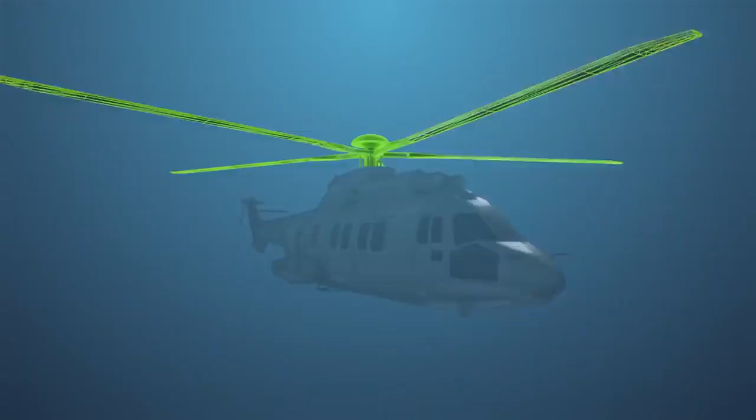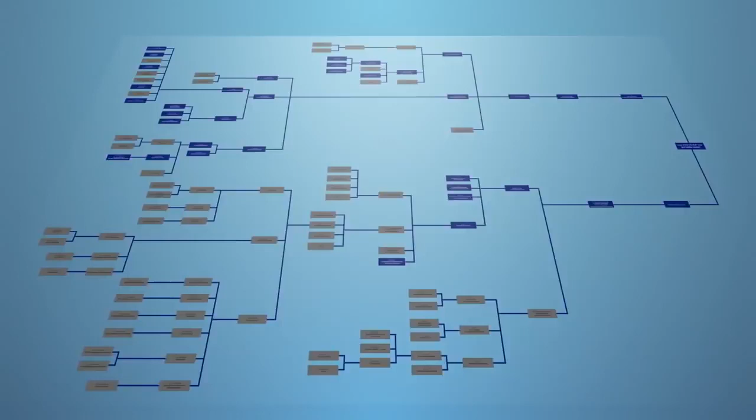Initial observations revealed that the rotor had separated from the cabin. In response, we began by listing all the possible scenarios that could have led to such an outcome, even the most improbable ones. One by one, every branch on the fault tree analysis was put to the test in order to confirm or rule out each hypothesis.

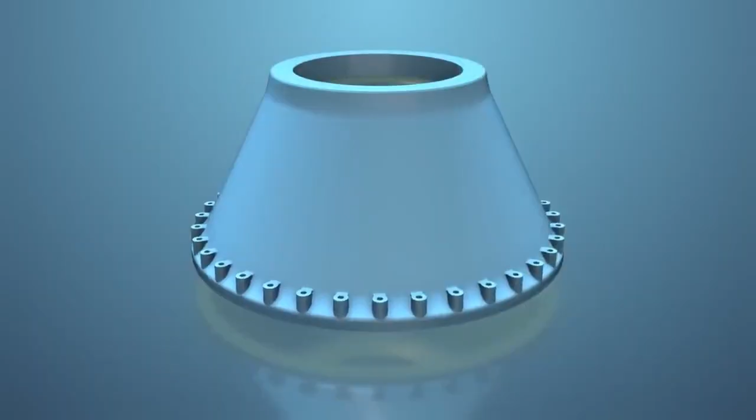We drew on all the information gathered by the investigators on site to piece together exactly what happened. Each and every detail was taken into consideration. We also used complex numerical models in simulating different failure modes, comparing them with observations of the actual parts.

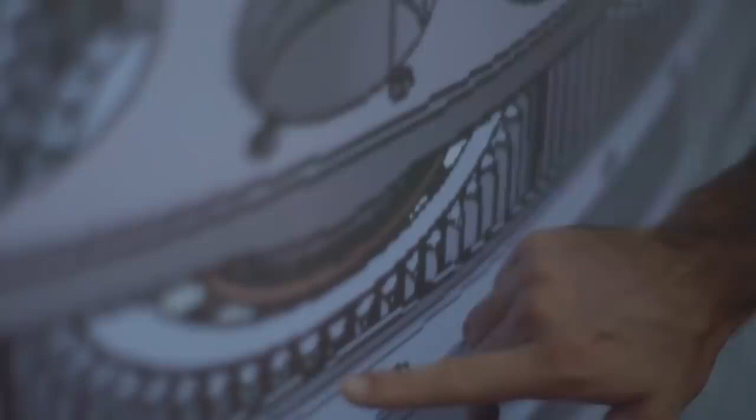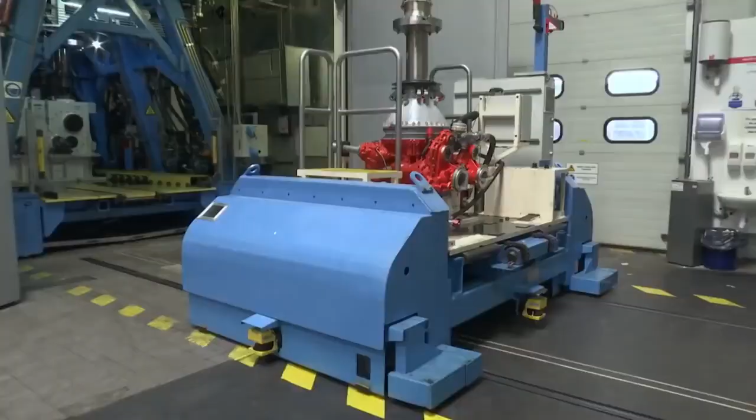In the meantime, we considered and examined a 2009 Super Puma accident that bore similarities. Finally, we carried out about 2,000 hours of testing in dozens of different tests, the aim being to reproduce the failure scenarios envisioned and to identify which one actually occurred. In total, more than 370 people were called upon during the course of a year.

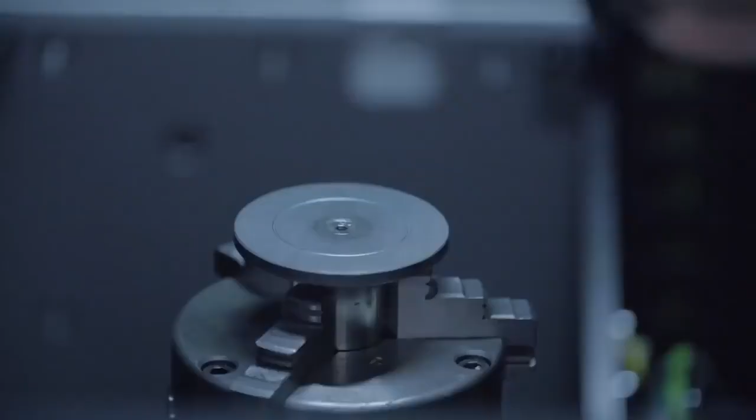Throughout the official investigation led by the Norwegian Accident Investigation Board and supported by Airbus Helicopters, we were able to identify precisely the sequence of events.

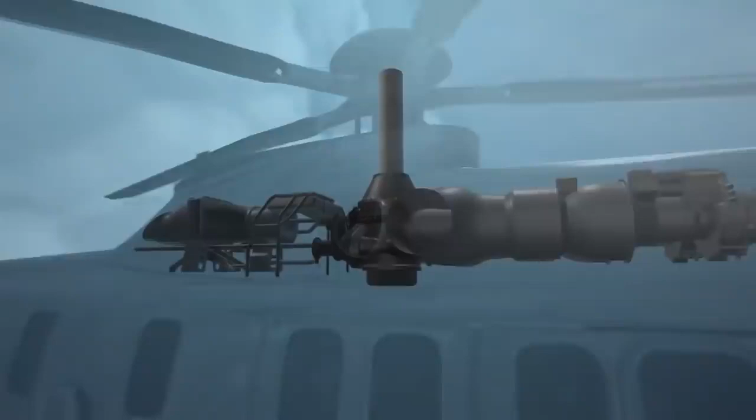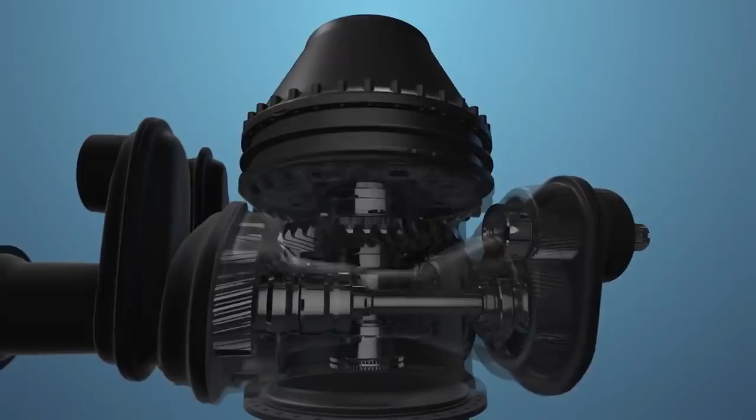The origin was traced back to the inside of the main gearbox, a key mechanism in the aircraft, as it transmits power from the engines to the rotors, while reducing rotational speed from 23,000 RPM to 265 RPM for the main rotor. The inside is a series of reduction stages comprising gears manufactured using the finest material and surface treatment technologies and in line with the highest quality standards.

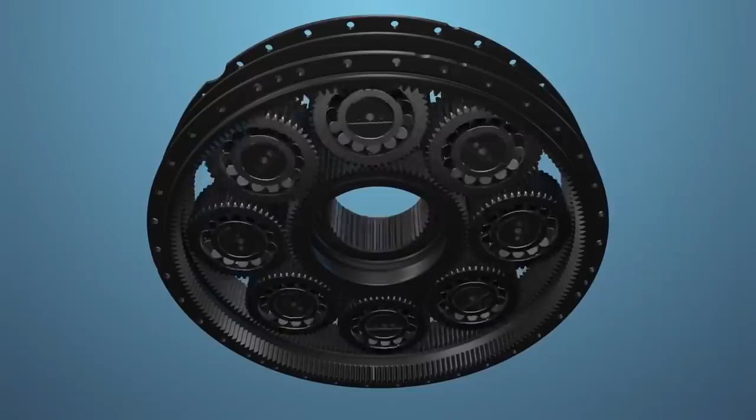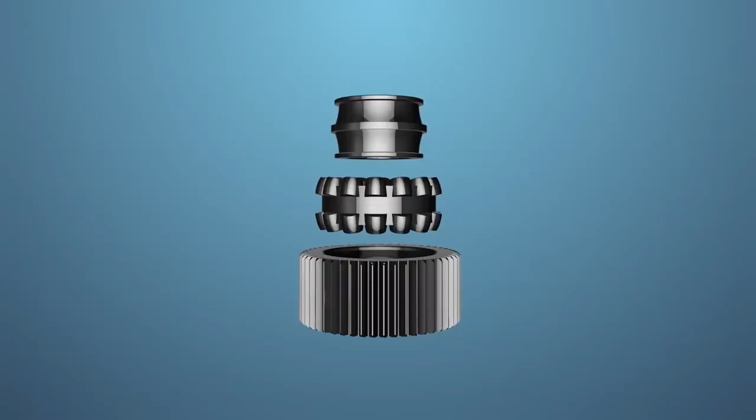The second stage, epicyclic gear train, comprises a sun gear, 8 planet gears, a planet carrier, and a fixed ring. Each planet gear contains 1 inner race, 2 rows of rollers, and 1 outer ring.

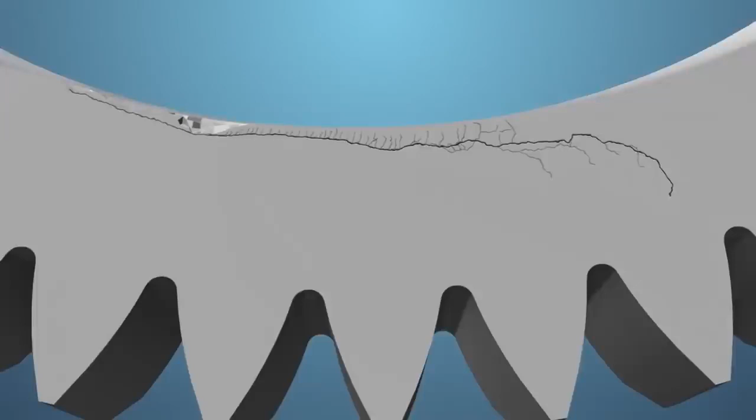It is inside this ring that the failure began, with an initial and very limited spalling. Unexpectedly, this very limited spalling gave way to a crack, which then spread until the planet gear split in two between 2 teeth. The space between these 2 teeth grew, causing a collision with a tooth on the sun gear. The planet gear broke instantly.

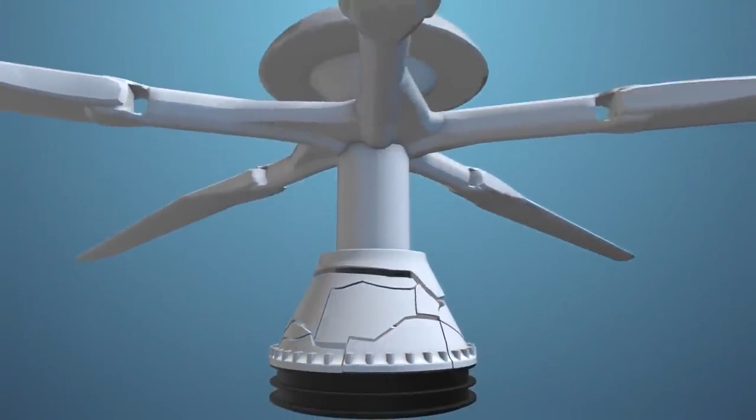Pulled by its own inertia, the main rotor caused the top section of the main gearbox to shear off and separate from the structure.

Let's go back to the beginning, however. How could such an accident have happened?

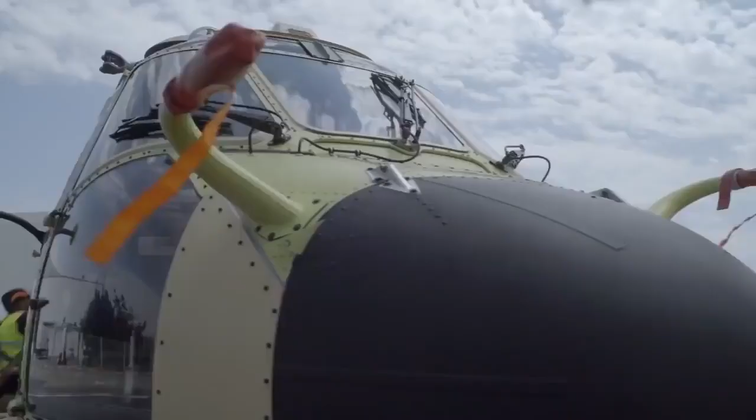The potential contributing factors were identified, and safety barriers were put in place to eliminate their reoccurrence. One of them is the non-detection of very limited spalling. Spalling is a normal degradation of bearings that remains acceptable up to a certain amount. This is monitored with magnetic plugs that collect the metallic particles.

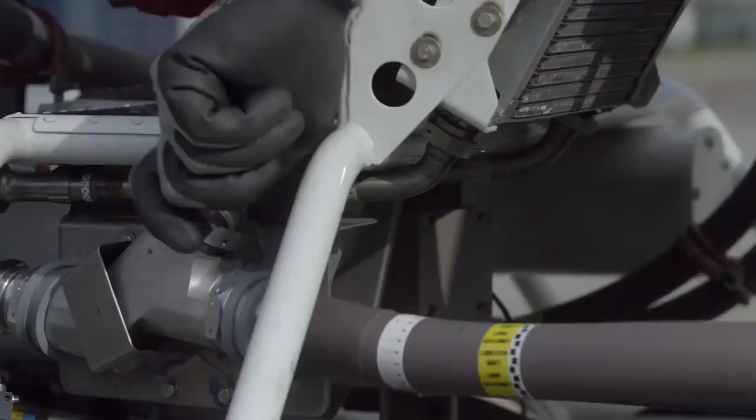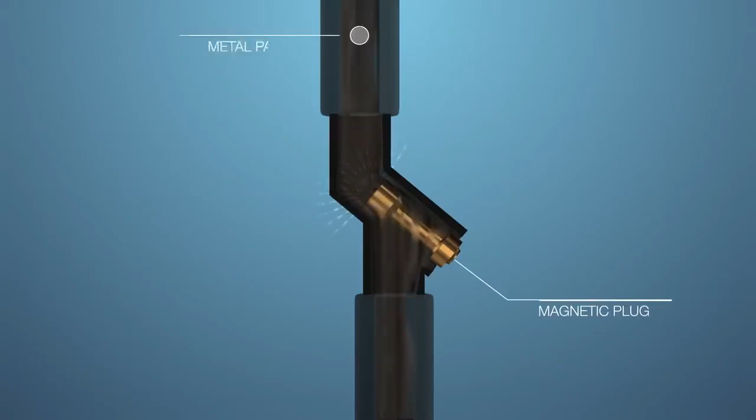In the case of LN-OJF, the defined practice of particle detection was not sufficient to reveal very limited spalling. We have therefore improved this practice of metal particle detection. The frequency of inspections has been significantly increased. Stricter removal criteria have been put in place regarding particle sizes. Detection methods were completely overhauled and now include a latest generation magnetic plug with increased performance.

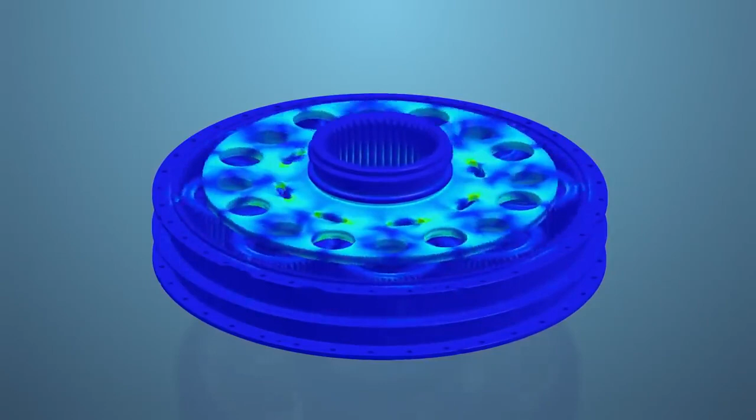Another potential contributing factor is the phenomenon of fatigue. Some metal parts subjected to high repeated stress have a defined number of cycles before their possible failure. Airbus Helicopters therefore defines a maximum operating time for each part.

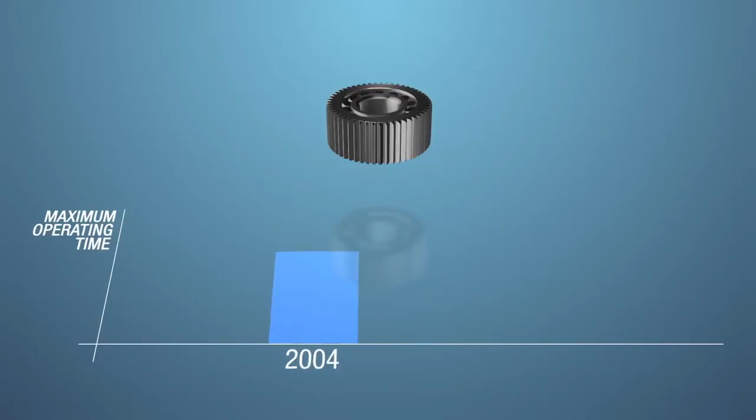In 2004, Airbus Helicopters defined a maximum operating time in accordance with the certification requirements. In 2017, based on the learnings from the accident investigation, this maximum operating time has been reduced by a factor of 4. Another potential contributing factor is linked to the design of the planet gear.

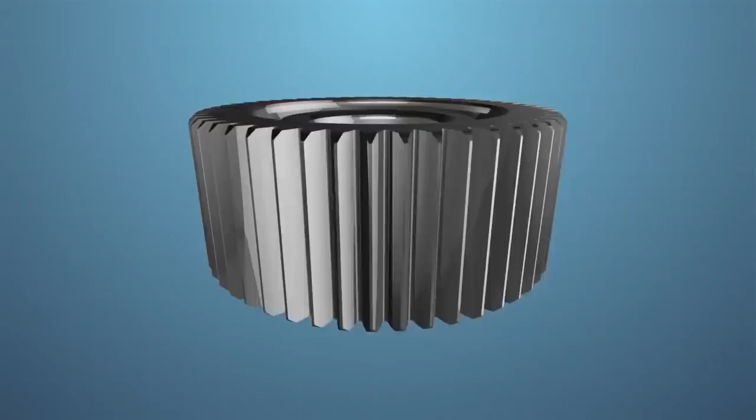Two suppliers manufacture these planet gears, and their designs are not 100% identical, even if both match the technical specifications. The second creates greater contact pressure and was used in the LN-OJF's main gearbox.

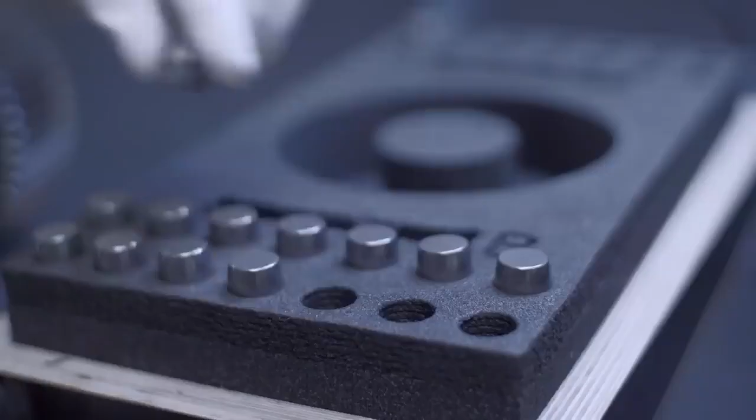This planet gear has now been prohibited outright. The only planet gear now present in our Super Puma family has registered 22 million flight hours without any outer race spalling having been detected in normal conditions.

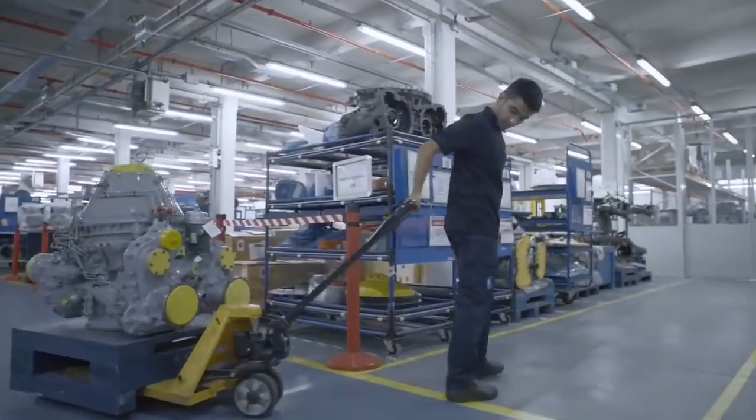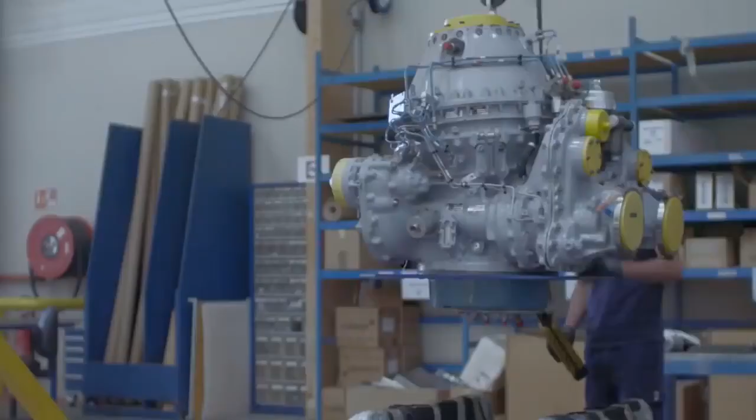Another potential contributing factor is external damage occurring to the main gearbox. Before being fitted onto the helicopter, the main gearbox in question sustained a fall during a road transportation accident. It has been decided to withdraw from service any main gearbox having suffered a shock, a lightning strike, a hard landing. In addition, we put in place a series of initiatives to improve the shock resistance of the main gearbox during transportation and to better report back any unexpected event.

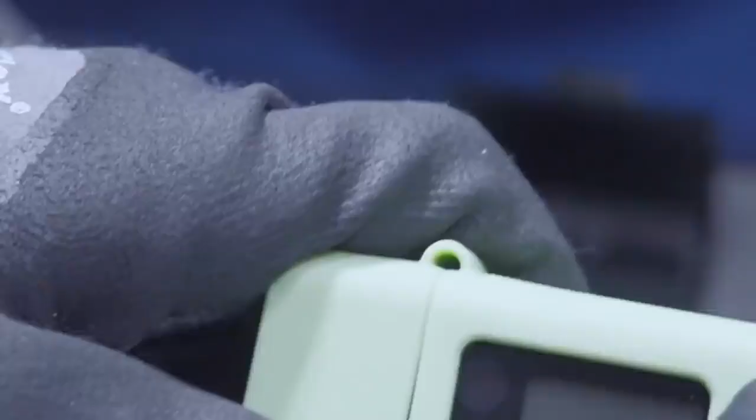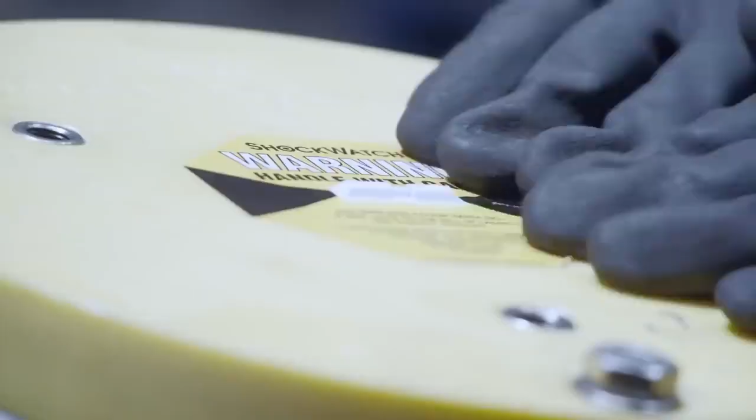Sensors that capture parameters such as temperature, pressure, altitude, lighting, inclination, and shock level have been placed on the main gearbox, and previous history of the part can be closely monitored. The packaging for the main gearbox now includes highly visible stickers that change color if the crate sustains a certain level of force or shock.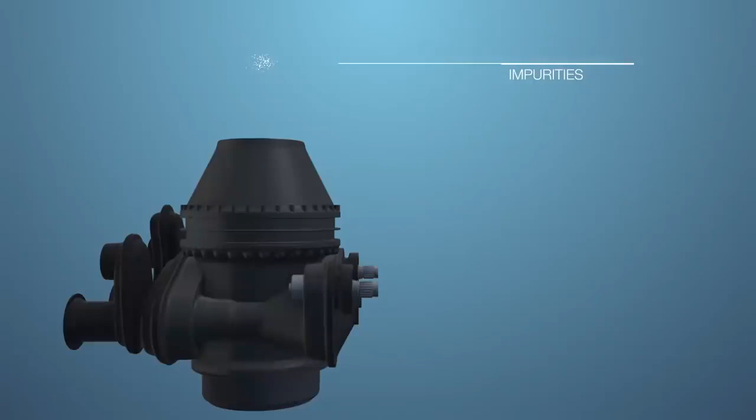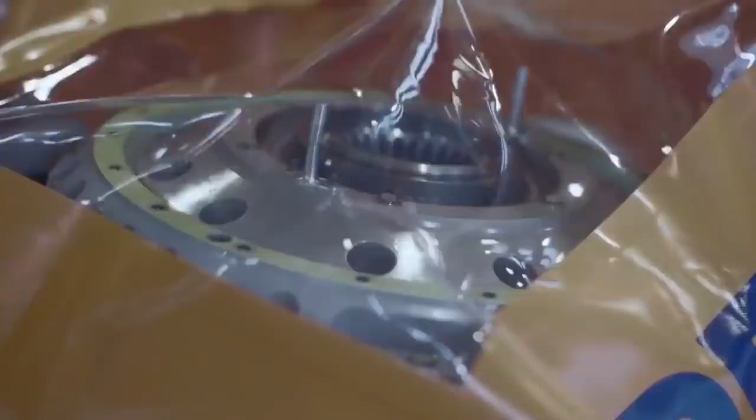The last potential contributing factor is a contamination by impurities finding their way into the main gearbox during maintenance, which then could have created damage in the planet gear leading to spalling. Additional measures have been put in place to protect the main gearbox during maintenance operations, and disassembly of main gearbox modules can now only be performed by an Airbus helicopter's certified maintenance or repair centre.

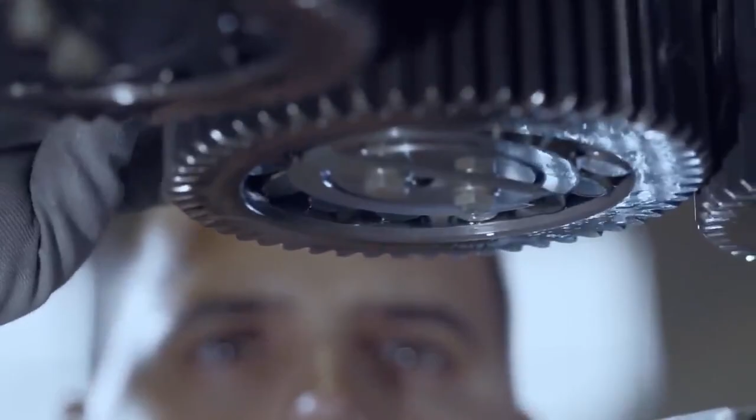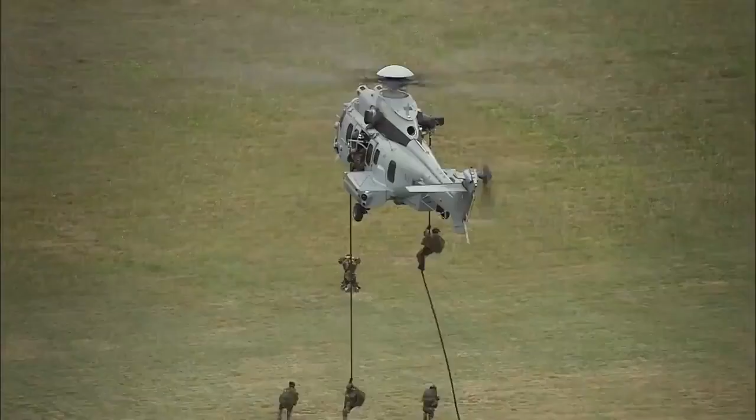The safety barriers put in place are aimed at eliminating the contributing factors to the LNOJF accident. Based on these measures, the European Aviation Safety Agency and all aviation authorities worldwide have approved the return to service of the H225 and the AS332L2.

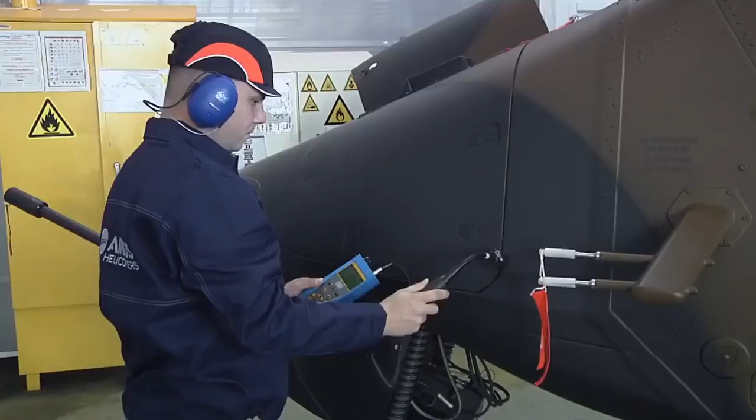Any accident is one too many, and in order to reach our zero accident goal, we are committed to continually improving. The investigation underway led us to thoroughly review and rethink many of our quality and safety processes, not only for the Super Puma, but for all helicopters in the Airbus range.

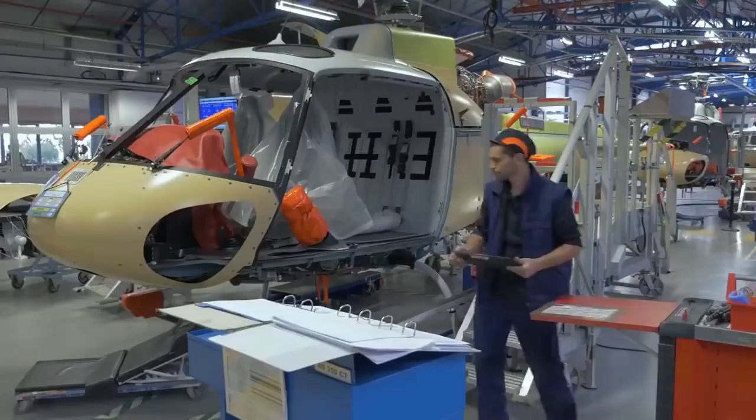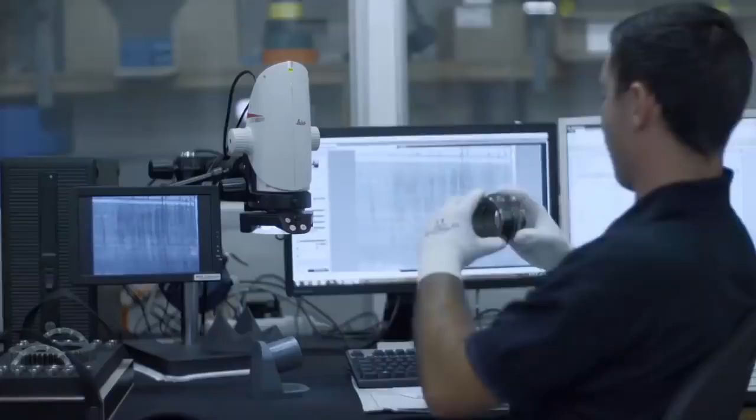One example is how we are working on improvements for handling and tracking dynamic components. This includes developing better solutions for documentation, repair feedback, and digital solutions for better traceability.

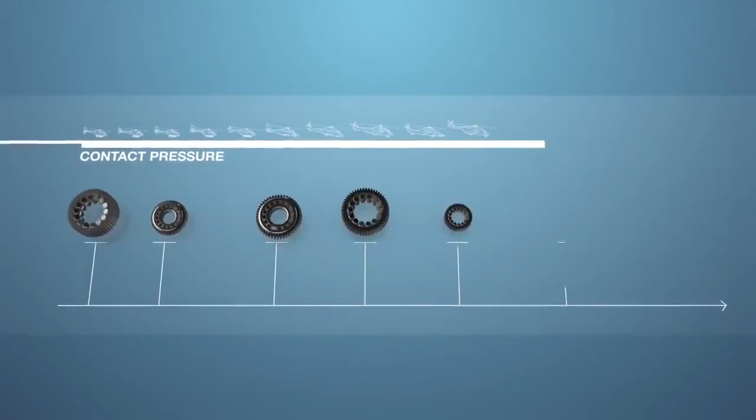Furthermore, taking what we have learned from these investigations, we have gone back and checked the stress analysis for all our aircraft. We took additional steps and applied the same strict standards on planet gear bearing contact pressure to our other helicopters, which led to the removal of 2 types of planet gear as a precautionary measure for the Dauphin family.

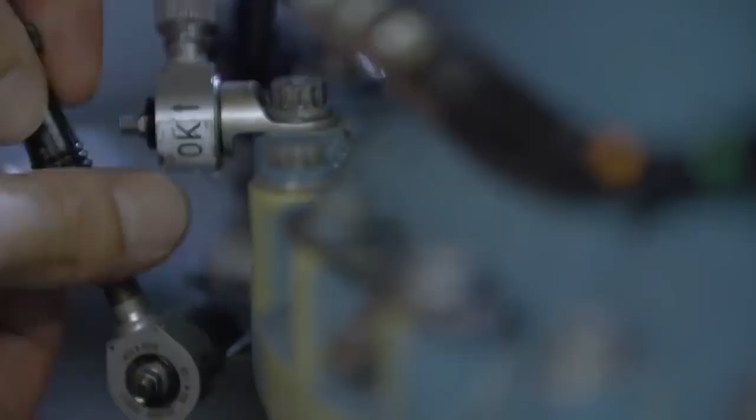Finally, we have launched a research program to innovate how we analyze vibrations. The vibration detection systems on the H225 are used to collect and analyze critical data to optimize the helicopter's availability and safety.

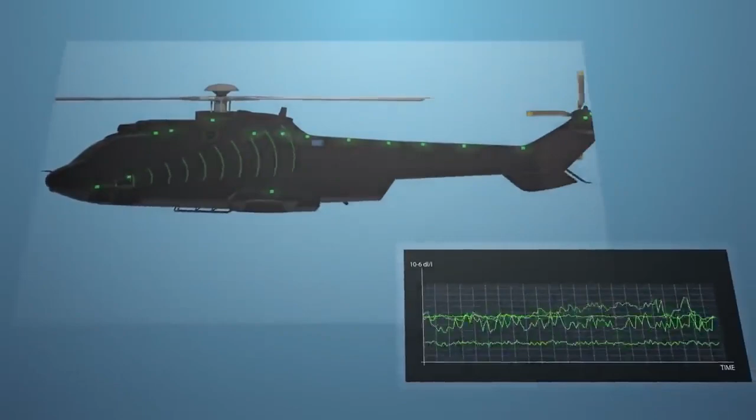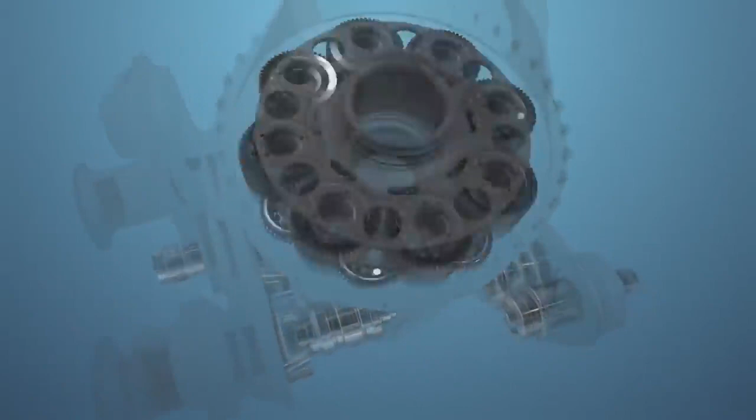We are working in partnership with leading university research centers on the detection of occurrences such as spalling and cracks. We already use vibration as a way to detect damage in fixed gears, but applying these methods to moving gears, such as epicyclic gear trains, does not exist. It requires the use of new sensing technologies and complex signal processing methods. We are seeing some promising developments in this field.

All this leads to improve our safety culture. To you who fly in our helicopters every day to complete your missions, and to you, our employees who test each helicopter before it's delivered, your lives are invaluable.

We are doing every day everything in our power to learn from this experience and to ensure that the Super Puma is flying with an increased level of safety. Just as we rely on your continued faith, you can rely on our unbending commitment to safety.